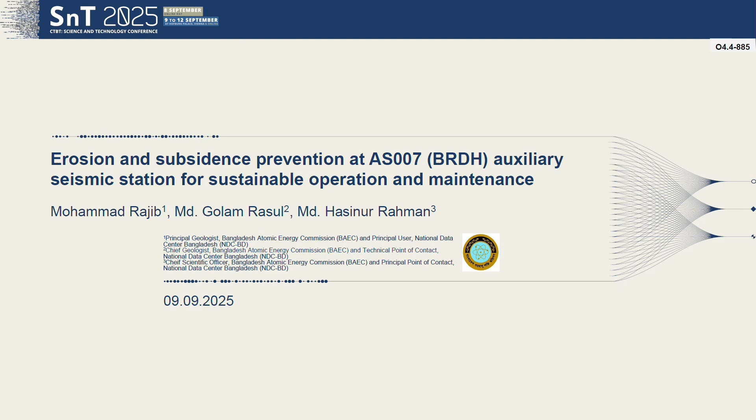Good evening, everybody. As the last talk, I do not want everybody to be sleepy, so unlike the previous research-based lectures, I'd like to show you a photo album to show the European Union contribution to BRDH.

We faced some problems. I'm Mohammad Rajib, working as the PKI operator and principal user of the NDCBD, along with two of my senior colleagues, Dr. Golam Rasul and Hasinur Rahman.

So we have the Bariyadhala station, an auxiliary seismic station, which is about 200 kilometers from the capital city, Dhaka. This is located in a tiny country compared to the rest of the world. We have only this one auxiliary seismic station, which faced a little bit of a problem previously.

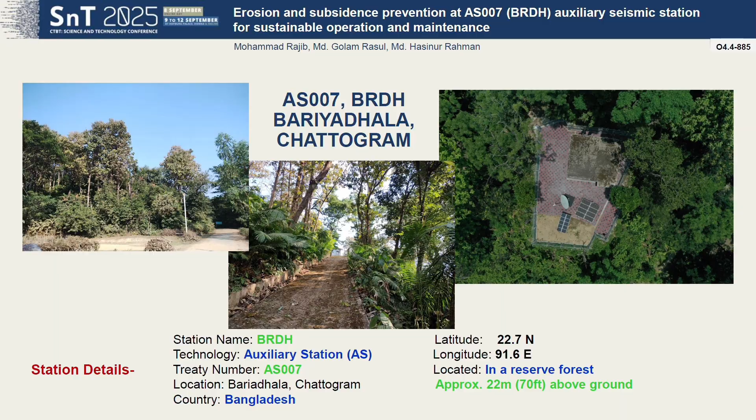This is the location of the station, on top of a hill, about 70 feet above mean sea level. Not a very tough condition to reach, but still this is an unmanned station, located in a reserve forest, and the area is not very populated yet.

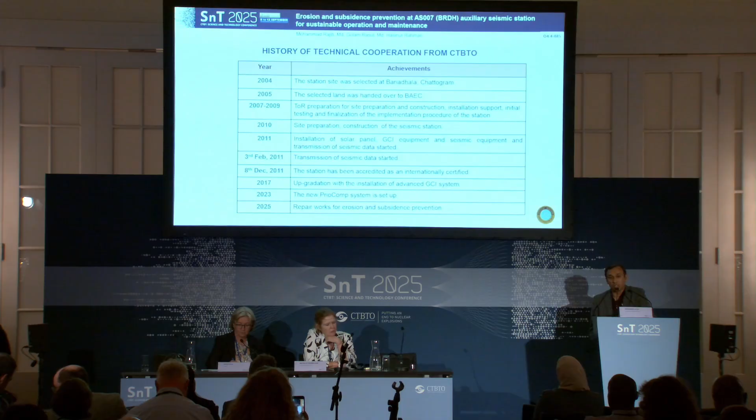We have quite a bit of history of European Union contribution and CTBTO technical cooperation, starting from 2004. The station actually started operation in 2011 after feasibility study and site selection. During 2017, there was an upgrade with installation of an advanced GCI system.

In the last 2-3 years, we had some technical setup changes in the computer setup, and this year we had a major repair and maintenance activity for this erosion and subsidence prevention.

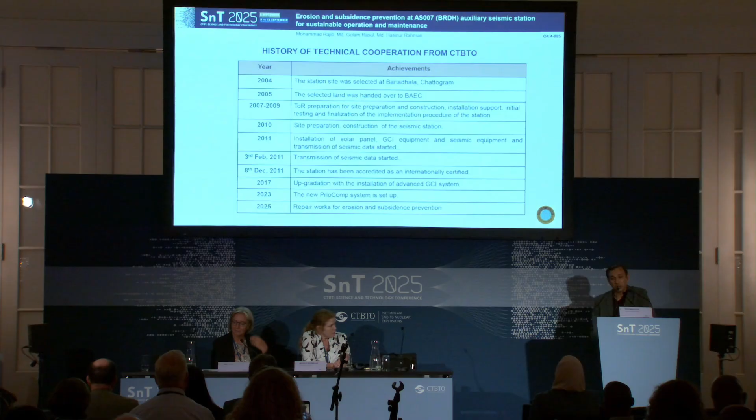As I said previously, we had one major problem at the vault. Even though it is above 70 feet on the hilltop, there were some flooding occurrences during the rainy season.

As you can see in the vault, there was some water infiltrating through the geological formation surrounding it. So we had to do some RCC work with epoxy cement and waterproofing admixture, and after that this problem was solved.

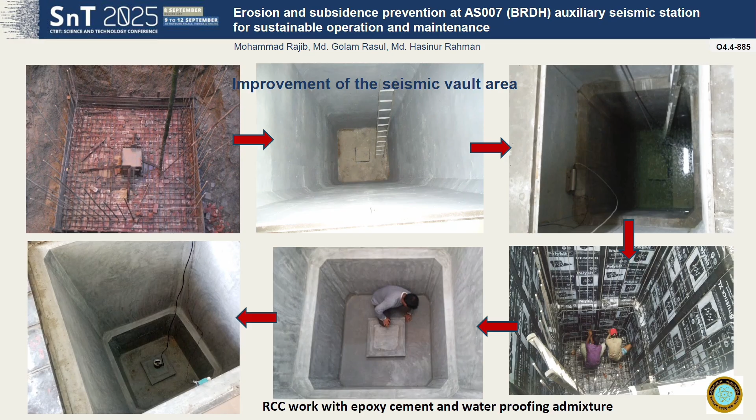But what we found in the last couple of years was some erosion of the hill around the station starting to occur, and also inside the building we observed some subsidence.

First, it was observed in 2021. We regularly visit the station, and we found lowering of the floor with cracks during that time, especially at the northwestern corner, about 7 to 8 feet from the seismometer seismic vault.

In 2 years' time, it actually became more than 2 centimeters in width. So it was very quickly subsiding, in our observation.

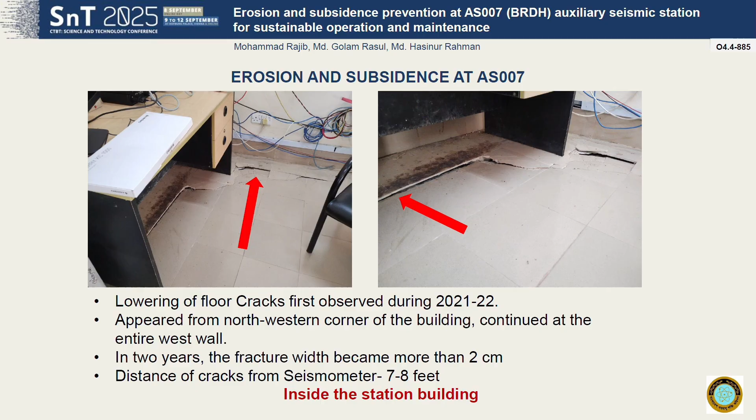Also the vault platforms - though we reinforced the vault with some work in 2017-18 and the vault itself was okay, the surrounding areas were subsiding. As you can see, the fracture width became nearly 2 centimeters.

On the east side, it was 1 centimeter. So on one side it was subsiding more, and the other side a little less. At the outside of the building, there were also cracks.

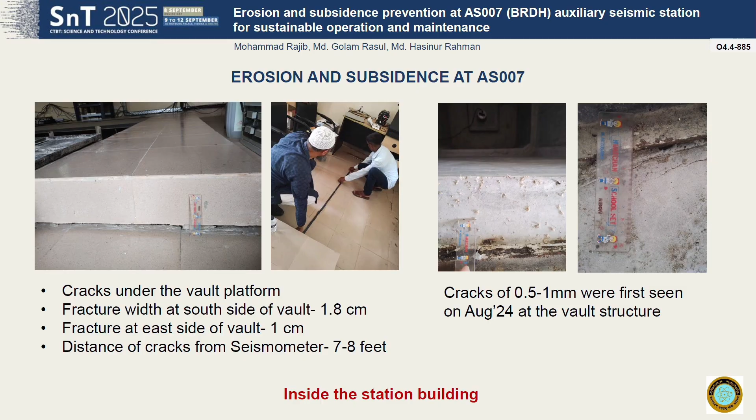In August 2024, we found cracks just adjacent to the vault. It was very tiny, 0.5 to 1 millimeter, first seen at that time, and we also found it on the outside of the building.

So we concluded that the whole building is at risk, and this needed serious intervention. We started discussing with the CTBTO, and they started responding immediately.

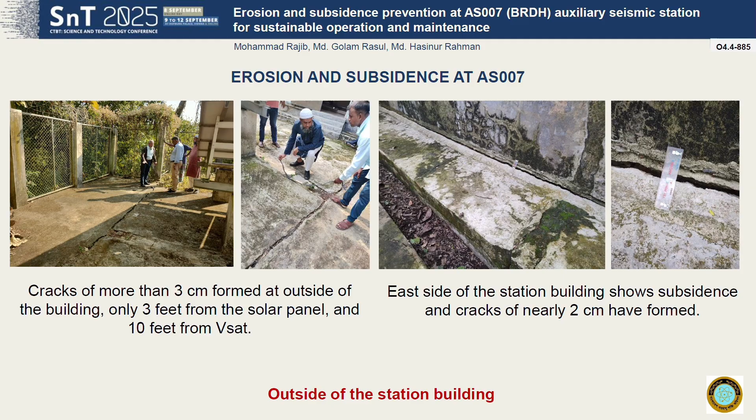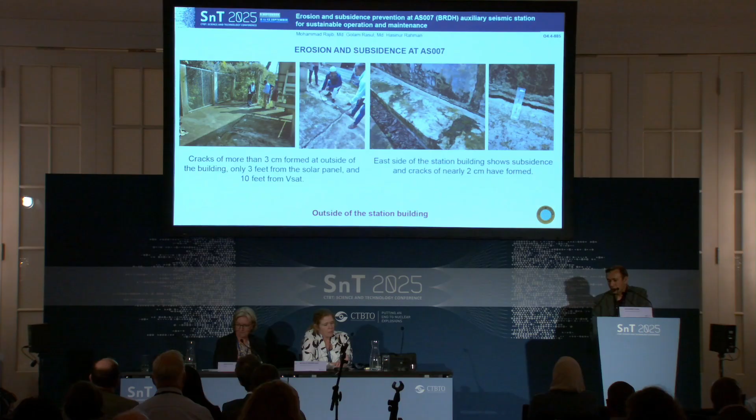We found near the hill area, where all the construction work ends, more than 3 centimeter cracks were formed. We were assuming that part - on the right hand side from my perspective - is almost hanging due to the erosion of the subsiding soil. So it was necessary to have serious intervention.

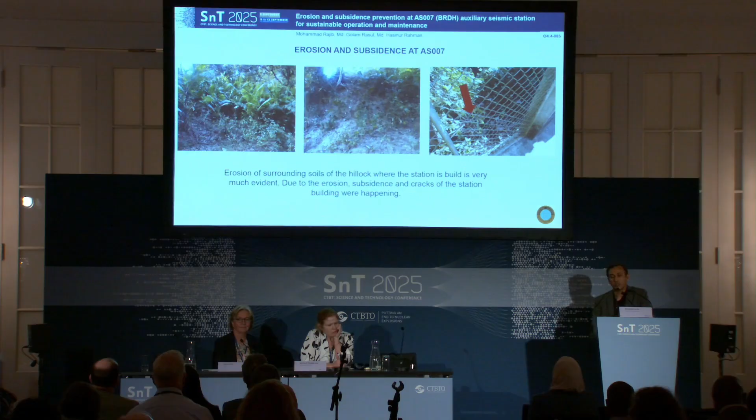On the surrounding hills also, we found that there are fewer trees, so the soils are easily draining out during the rainy season.

We started discussing this in May 2023, during an unofficial visit to the VIC. A problem report was opened, and after several discussions through mail, a request letter for quotation was published by the CTBTO, and we provided a work order to one subcontractor from the Bangladesh Atomic Energy Commission, the technical counterpart of the CTBTO in Bangladesh.

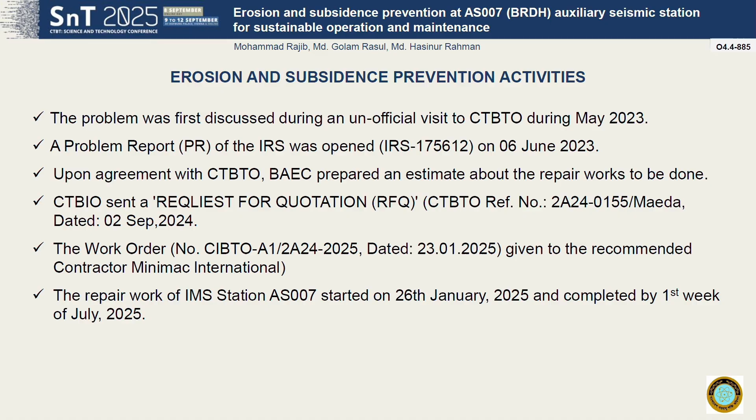The repair work started during the last week of January 2025, and by the end of the first week we completed it and started the network again. These are just some of the activities. As I said, I will show you a photo album.

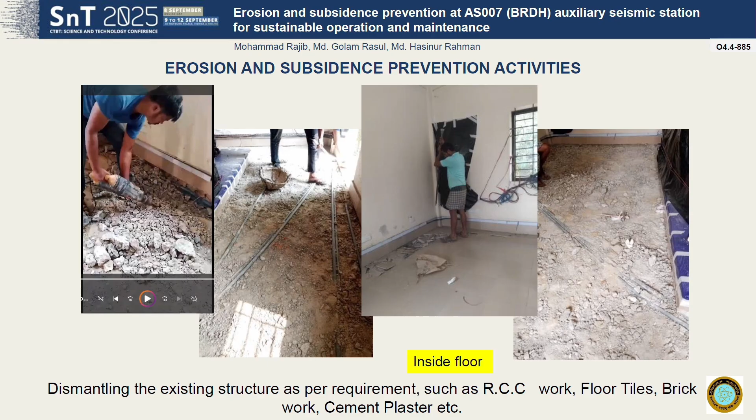There is nothing research here, but we had some good work at this station. We had to dismantle the existing structure, the floor of the station, the entire station as per requirement, such as the RCC work, floor tiles, brick work, cement plaster, everything we had to dismantle. Later, the outer part also, which was showing some kind of crack that was increasing day by day, so we had to repair that one as well.

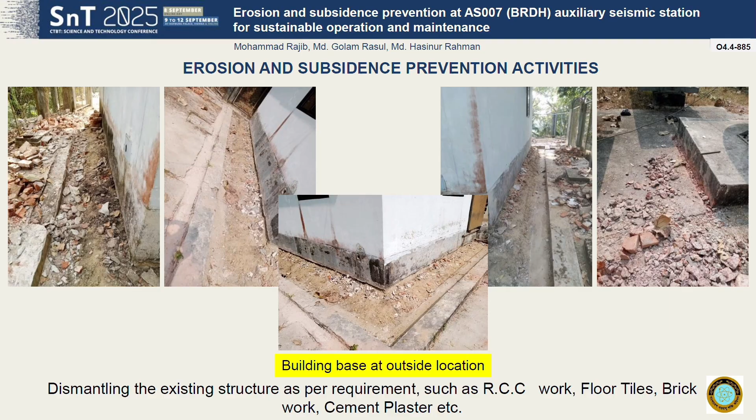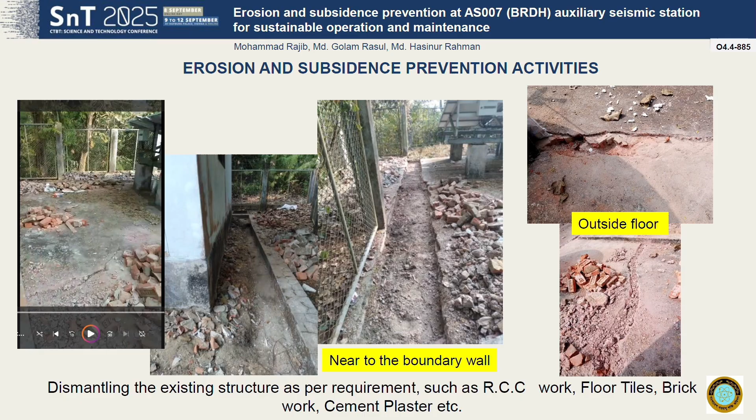This is a little bit of the outer area. The engineer said we will have to make a drainage channel to run the rainwater very quickly and not touch the station building. So the drainage channel was planned and designed. This is some of the safety canopy.

After every work, we had to send all those photos to the CTBTO. They were monitoring remotely, and we were taking those photos of every work. I could say each day we had a photo when they were working.

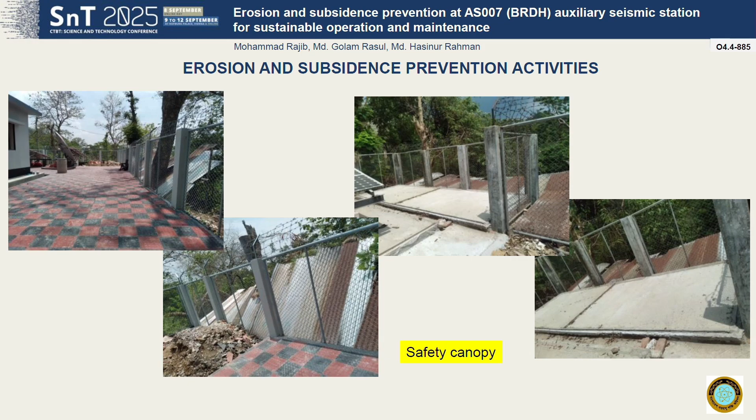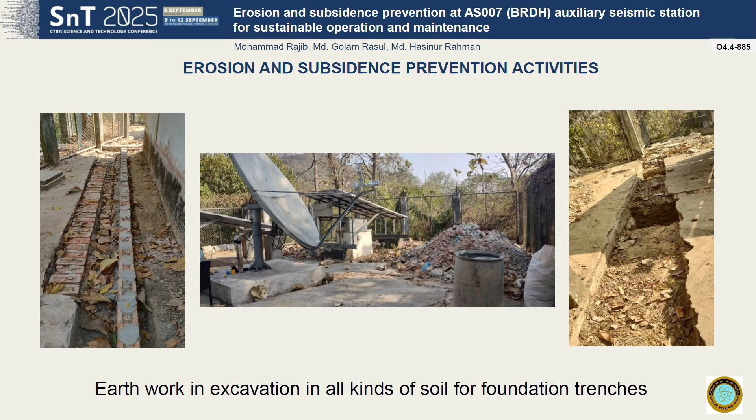Earthwork in excavation was done surrounding the building. At that time, the complete setup inside the network, the connection to the satellite, everything was disconnected. So we had nearly 4 or 5 months' stop of the BRDH connection to the IDC.

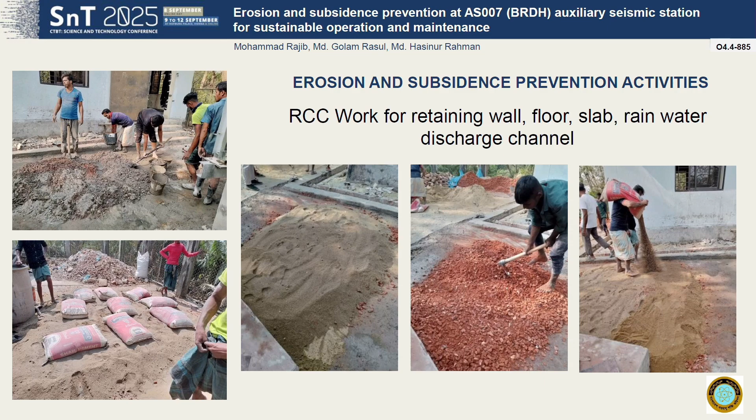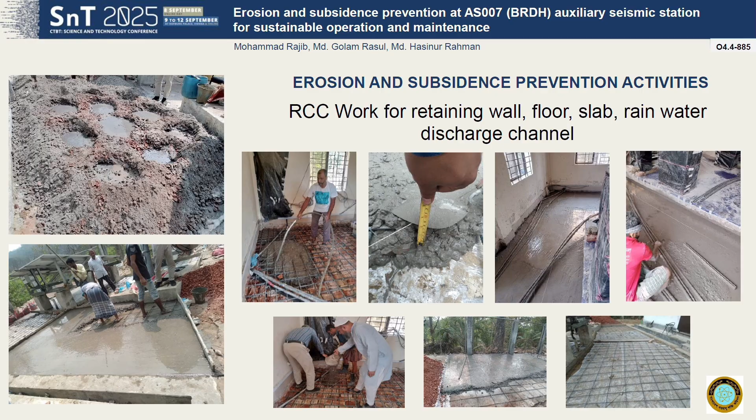Later, we had to do some retaining wall, floor, slab, rainwater discharge channel, everything we did successfully. These are some of the works, the pictures, so we did it inside the building, outside the building, surrounding the building to make all those happen. And later it became actually a new look.

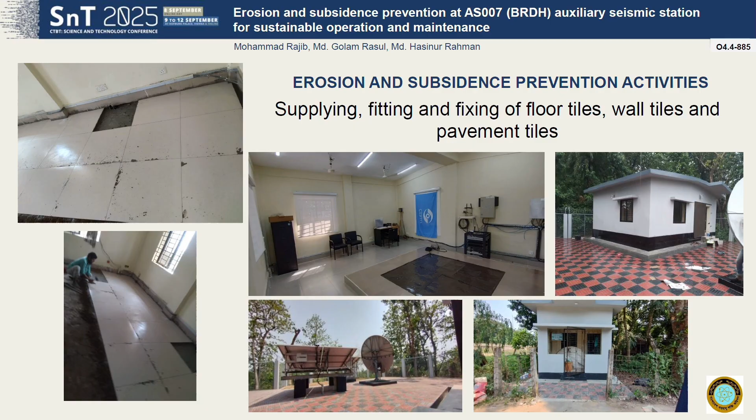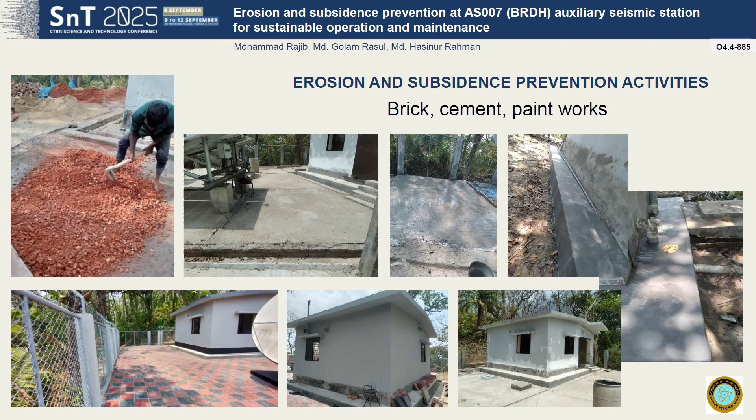The floor tiles were given new, the entire electrical work was done, the floor tiles or pavement tiles outside the station building, surrounding the solar panel, everything was done new. There was some brickwork, paint work, cement work also done to strengthen and give the station a newer look.

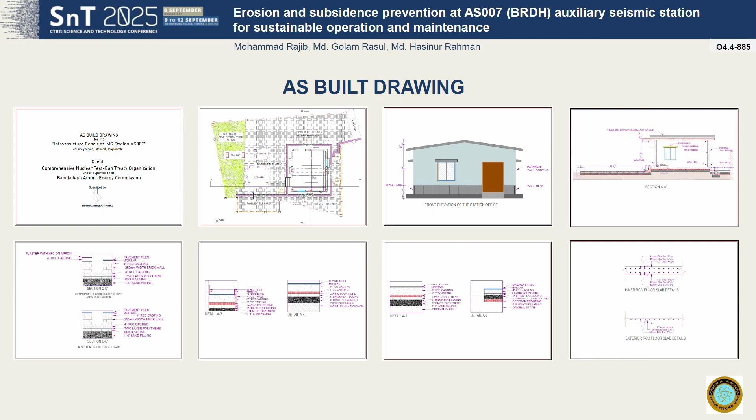These are some of the inside activities, like electrical activities, the cleaning of the existing windows, according to this as-built drawing we were provided by the engineers.

As I said, erosion was occurring surrounding the hills, so we had to do some preventive measures there as well. There were some boundaries with barbed wire fencing surrounding the hill, so we had to construct some new fencing, and repaired and painted the old ones as well. Partly this was funded by the Bangladesh Atomic Energy Commission because it was outside the work order.

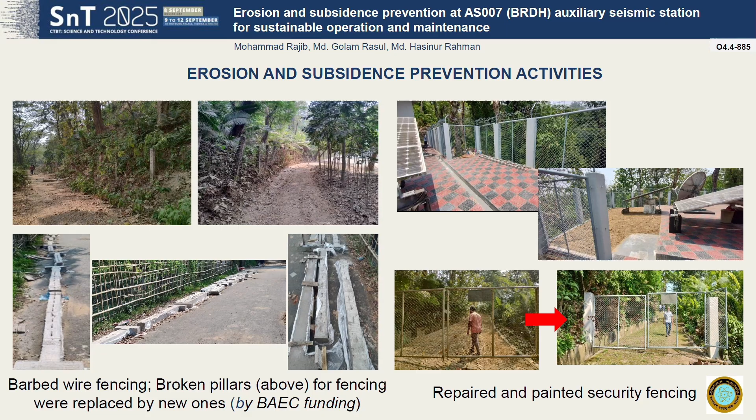Some part will be contributed by the European Union, and some part will be done from the own budget of the BAEC.

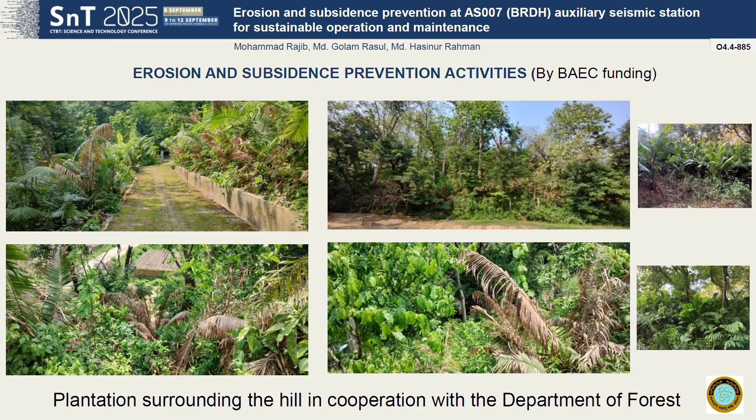I'd like to acknowledge here two persons from the CTBTO especially, Miss Irene Bianchi, who is most probably online. So thank you, Irene. It was your idea to start the discussion and, I should say, save the building. And then Ms. Chulalak Sandud, who is now in charge of the seismic engineer for this station. Both of them were completely online with our team to make this happen and make it successful. Thank you very much, everybody. Thank you.

It's very nice that you give credit to the CTBTO and the Today, Tomorrow Together initiative. That was really nice to hear.

Thank you. Is there any questions on this? No? That's probably because it's last on the day.

Thank you very much. It sounds like a very serious technical challenge that you have been able to solve, so all credit to you for that. Thank you very much. Yeah.